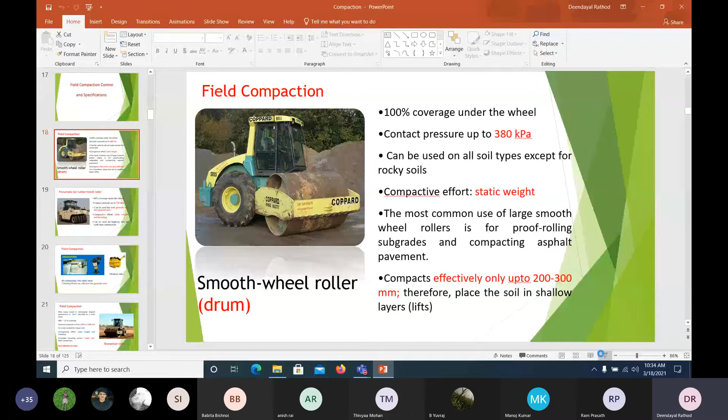So as I said, compaction generally, we need to find out the optimum moisture content from the laboratory test, and the maximum dry density. But how do we generally do this in the field?

We use this smooth wheel roller, heavy, which covers 100% of the area, and contact pressure can be up to 380. This particular compaction is effective only up to 20-30 centimeters.

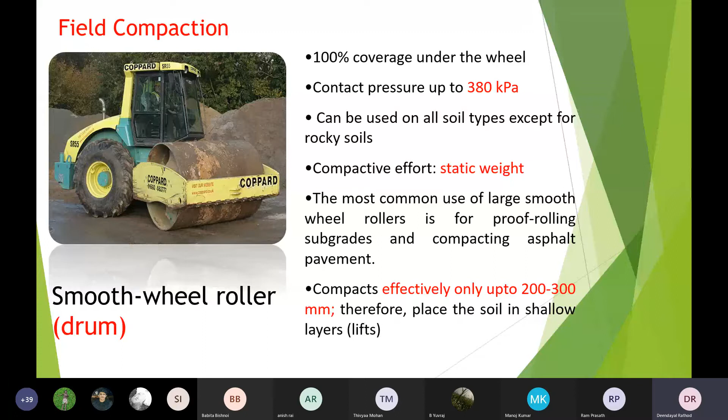You might have seen in villages where people lay down roads, we use this. And nowadays, not only static but dynamic compaction also exists - this roller may vibrate, the drum may also vibrate.

In foreign countries, you could see they use tires also - pneumatic rubber tires. Here 80% of the coverage area, but contact pressure would be high. By using this, both granular and fine grained soil can be compacted. Because of this, there would be some kneading action, so it can be used for highways, earthen dams, and so on.

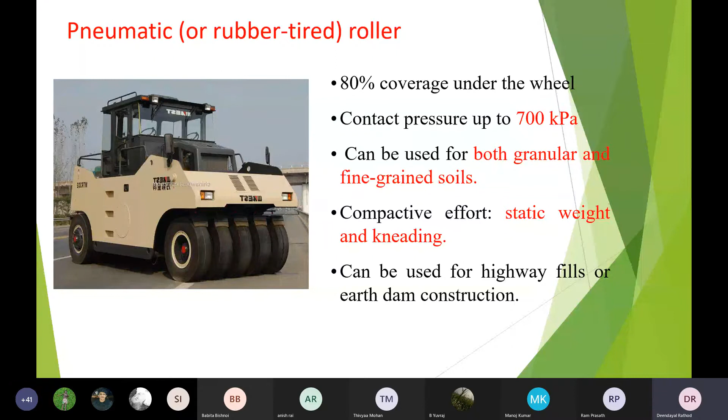There are some smaller size vibratory rollers also, whatever you are able to see in the figure. Wherever we cannot use a bigger size of roller, at inaccessible points where we cannot access, we can use these vibratory rollers by using plates for granular soil or cement, concrete, and so on.

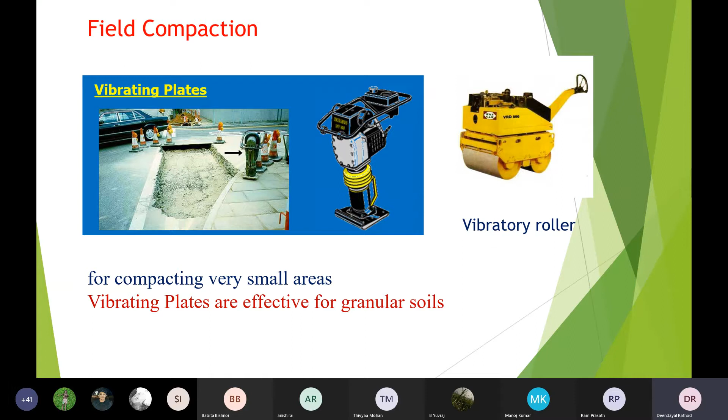This also can be used, and this is very important - this is like a rectangular shape, protrusion of feet attached to a steel drum, like our feet. Because of the kneading action, this particular roller would be used for clay soil, which is why it is called the sheepsfoot roller. Like a sheep foot, there would be some kneading action, because of that this type of roller will try to compact the clay type of soil.

It is not effective for sandy soil because we cannot use this kneading action there, it may not be required. But in the case of clay soil, this kind of kneading action can be used - very effective on clay soil, you must remember that. It is called the sheepsfoot roller.

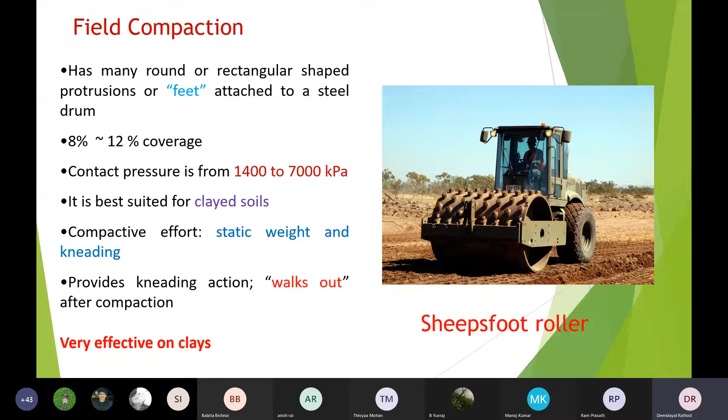And there are some rollers that provide deeper depth compaction - the impact roller, it will try to drop from some height, and we can give the impact load. It is effective up to 2 to 3 meter depth, like for example an airfield.

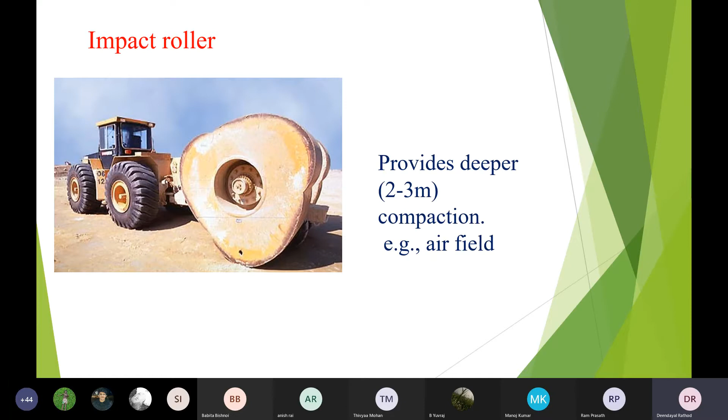Suppose I want to construct a platform or an airfield, where taking off and flights take place, a huge ground - there we will use this, because flights also land with impact load. The ground where flights take place or land should be very strong, should resist against the impact load also. So we use this kind of impact roller also.

And the tamping foot roller, this is one more type like a foot. It is best suited for fine grained soil like silt and clay soil. Static weight and kneading action would be there. Contact pressure would be very high, 1400 to 8,400 kPa, but coverage of area may be less, around 40%. The roller's coverage area would be 40%, but there would be kneading action, so we can use this kind of roller for clay type of soil.

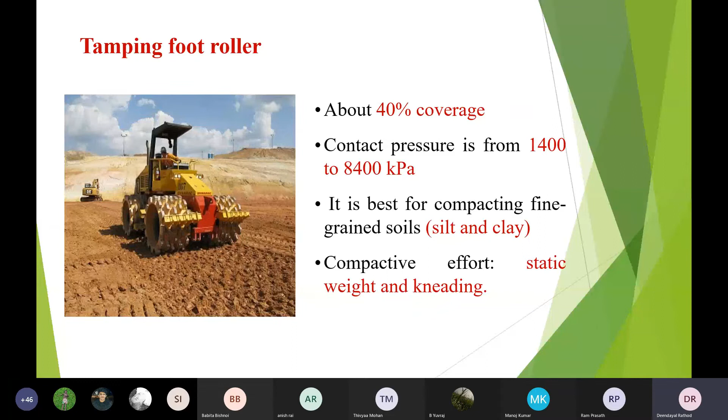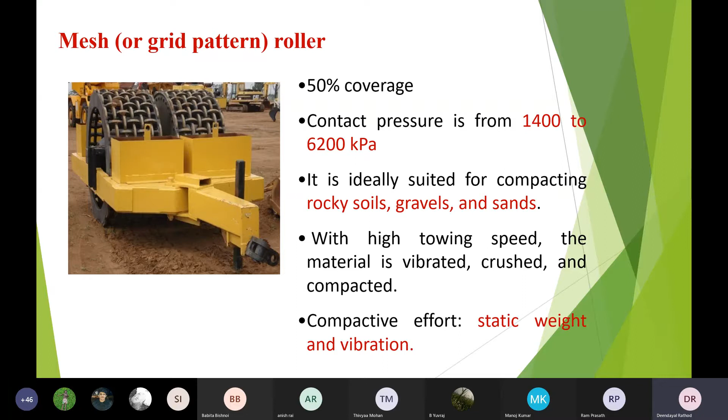Mesh or grid pattern roller has general 50% coverage, and it is ideally suited for rocky soil, gravelly soil, sandy soil, because rocks may break with this mesh. So this particular mesh kind of grid roller can be used for rocky soil - some soil will have soft rocks, so we can use this kind of roller also.

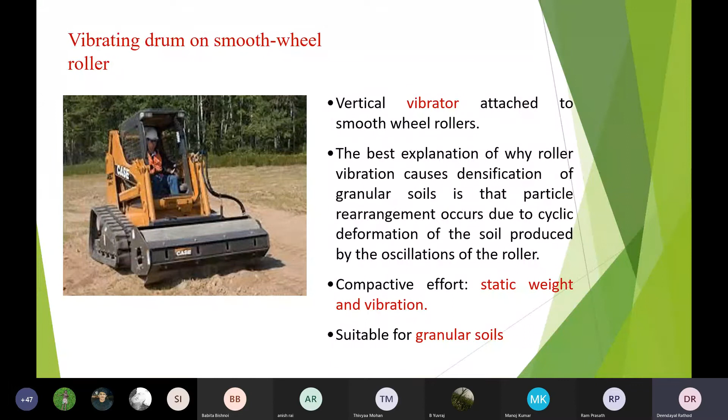And this is vibrating drum on smooth wheel roller. Wherever you cannot access, looking like a tanker, this kind of roller also can be used.

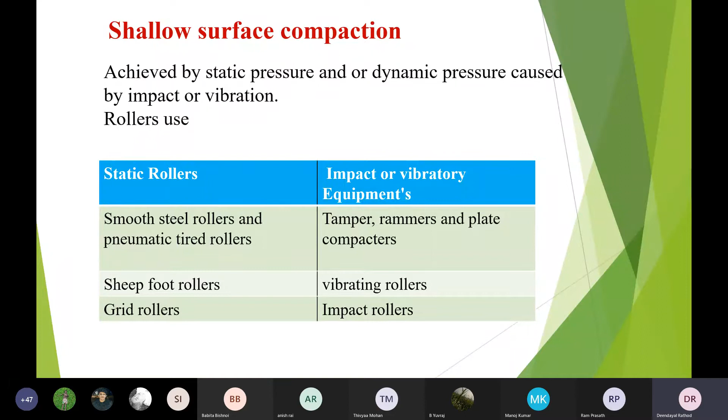Shallow surface compaction is generally achieved by static pressure and/or dynamic, impact, or vibration rollers. In the static rollers we have smooth steel rollers, pneumatic tires, sheep foot rollers, and grid rollers. In the impact and vibratory equipment we have tampers, rammers, vibrating rollers, impact rollers, and so on.

Now this is all about the static methods. For a lesser depth, we use this kind of rollers. Suppose I want to compact soil at a depth greater than a few meters, say 20, 30, or 40 meters or more, in that case we use dynamic compaction also.

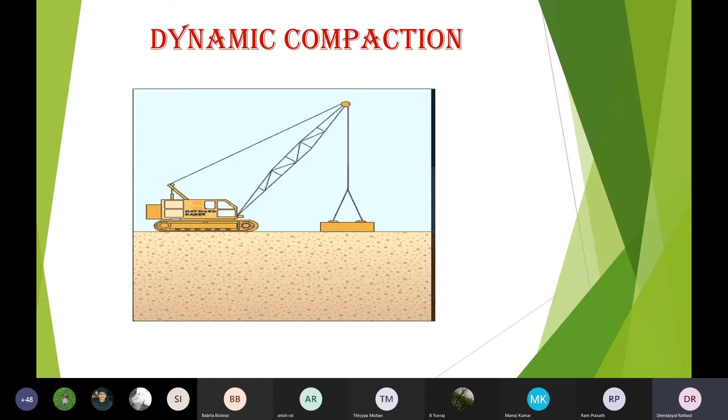For any bigger size of project, if the soil is loose, we use dynamic compaction. There are some companies doing this. Look at this picture: it is the compaction of unsaturated or highly permeable saturated granular material by heavy tamping.

The response of the tamping is very immediate. Weight ranges from 6 to 172 tons. Tons means 1000 kg, so 6000 kg to 172,000 kg weight would be dropped from a height of 10 to 40 meters, using cranes and so on.

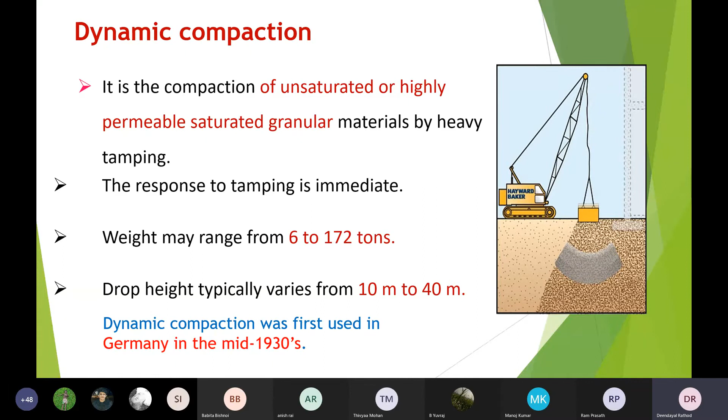This method was first used in the 1930s in Germany, and even now it is very common nowadays.

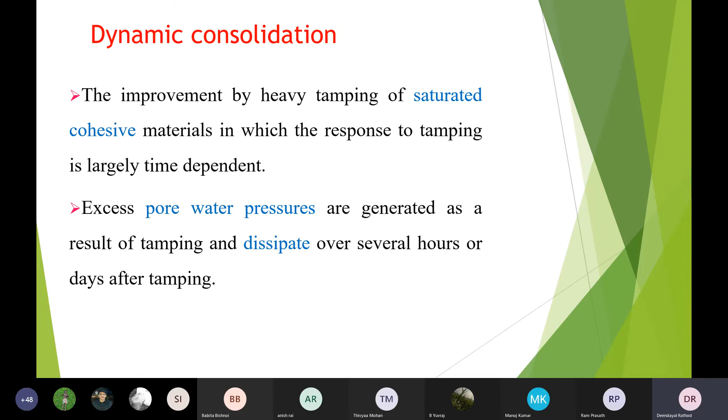The improvement by heavy tamping of saturated cohesive material, in which the response to tamping is largely time dependent: excess pore water pressure is generated, and dissipation of that may take place over several hours. This is because the soil holds some pore water pressure in the voids, and because of that it takes some time to dissipate.

You could see from here how heavy the weight is, and in addition a tire is also added, or some vehicle tire. This mass can be made of concrete, and there would be a hook to lift it, then it would be dropped from a height of 10 to 40 meters.

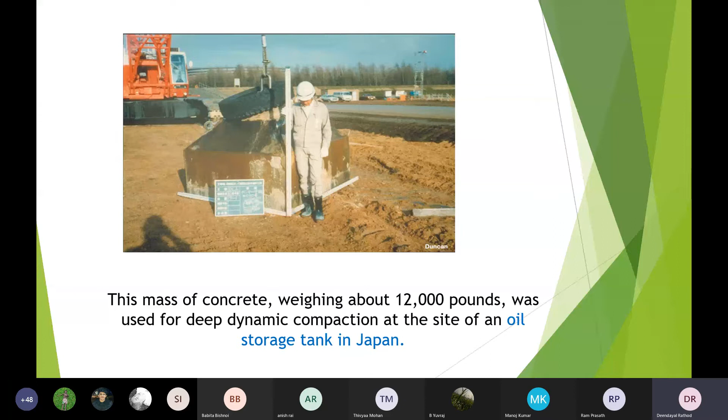Nowadays, even developed countries have bigger equipment for compaction. You could see the mass is lifted to a height of 50 feet, and then dropped. Look here when it hits the surface.

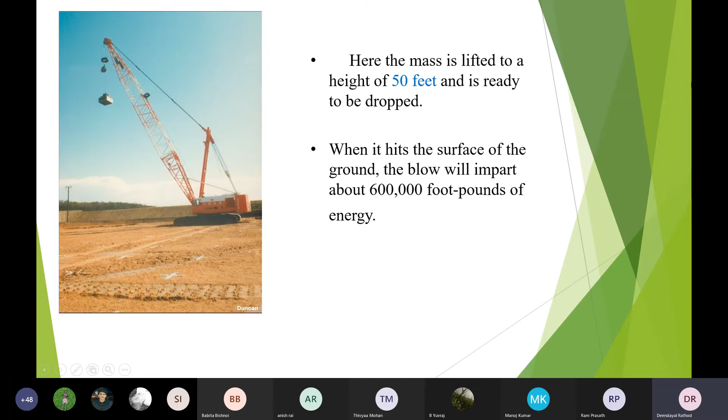I will show some more pictures. After dropping it, you could see some craters. Those dropping holes, whatever marking you could see, are called craters. I will show some more pictures.

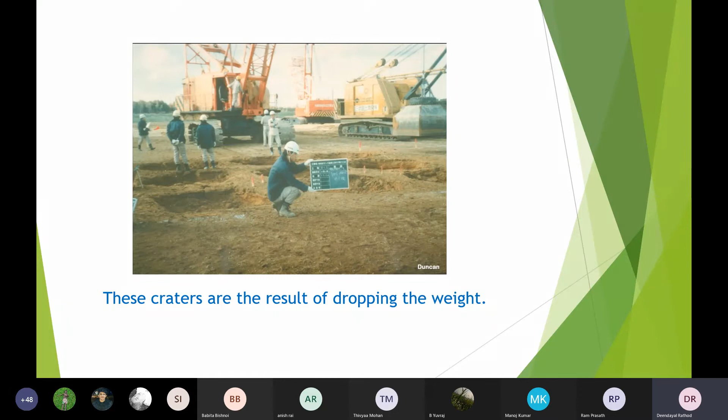This is what it looks like with dynamic compaction, and this is suitable for granular soils, landfill, and karst deposits. These are all called craters, created by the impact load.

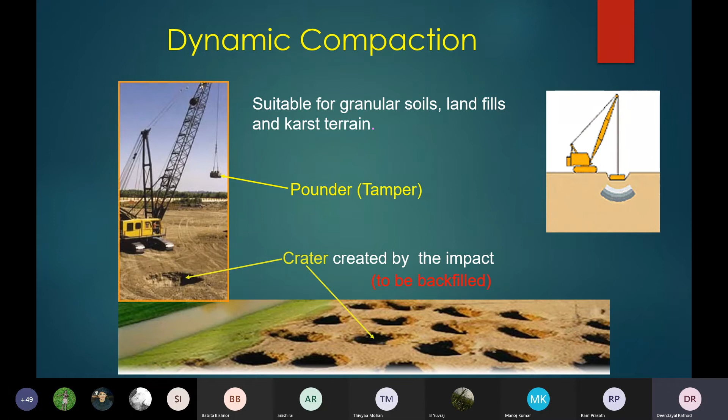To be backfilled, we again add soil or sand into the crater, and again we compact it. So this again shows the process.

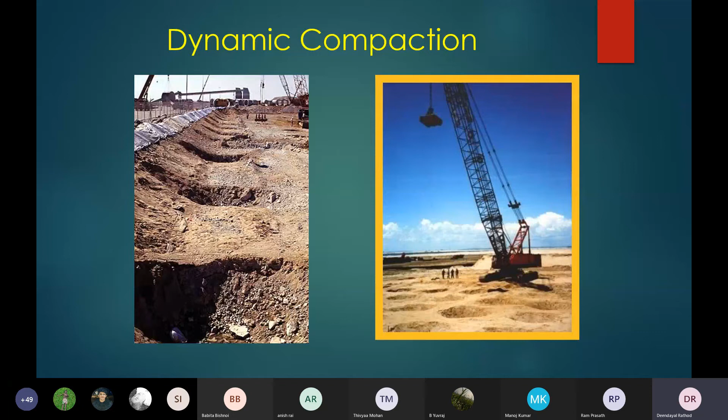This technique is used for very big projects. You might have seen some made-up soils in many projects. We have even created artificial islands like the palm tree in Dubai, and so many airports in Japan, Singapore, and other smaller countries. Because these countries are very small and don't have much land, they bring this made-up soil from somewhere, and the soil would be compacted.

They have done small islands, also artificial islands, where they have constructed their airports. Likewise there's a lot of use. We use many equipment for compaction.

Most soil types can be improved, including silt or some clay soils also can be improved, but compaction is mainly used for granular soil. Other methods like consolidation can also be used generally for expulsion of water, but for compaction we use granular soil only.

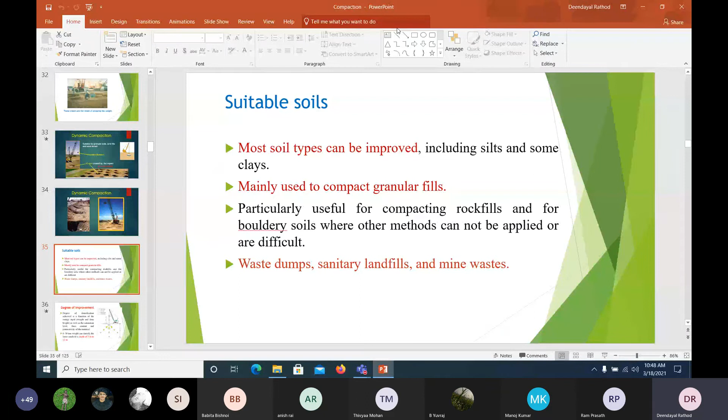It's particularly useful for compacting rockfills and boulder soil where other methods cannot be applied - waste dumps, sanitary landfills, mine waste. Nowadays we generate a lot of waste, so that waste can also be compacted. In the landfill we can use it, and after that waste we can convert it into fertilizer also. A lot of research is going on in this area.

We can find out the degree of improvement - they have some pattern while doing dynamic compaction. Look at these pictures, how beautiful it is - deep craters are formed by tamping.

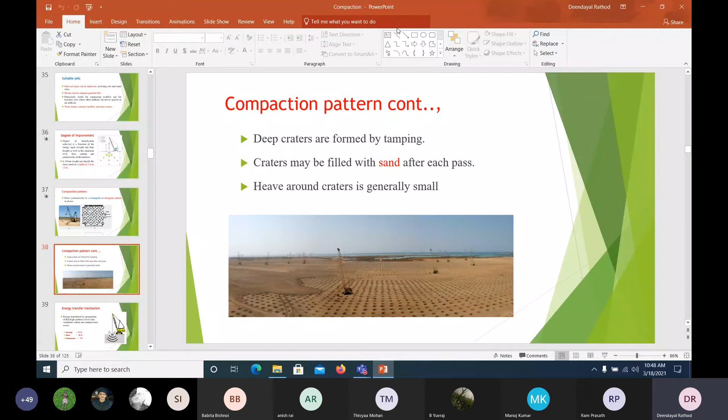Again it may be filled with sand. Some energy transformation also takes place - about 67% may be Rayleigh waves, then shear waves and compressive waves. Because of that also, compaction takes place.

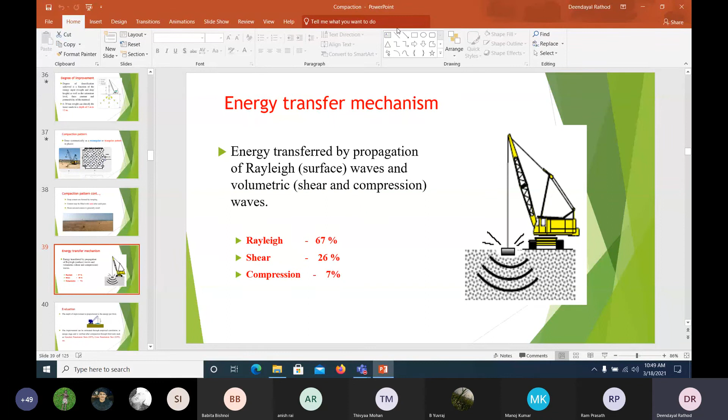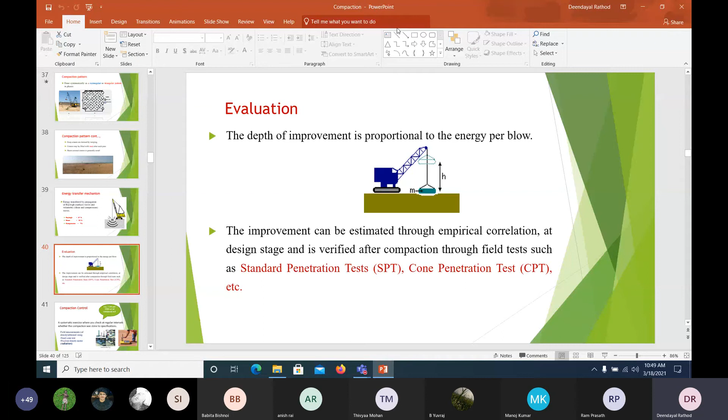We can evaluate it using SPT, CPT tests - there are some tests, that anyway we'll see. In geotechnical engineering too, you will see how we can control the compaction in the field also.

We have already seen this formula - how we can find out the relative compaction in the field and in the laboratory, multiplied by 100 will give the relative compaction. Generally, a typical required value would be 90 to 95, which we will get easily.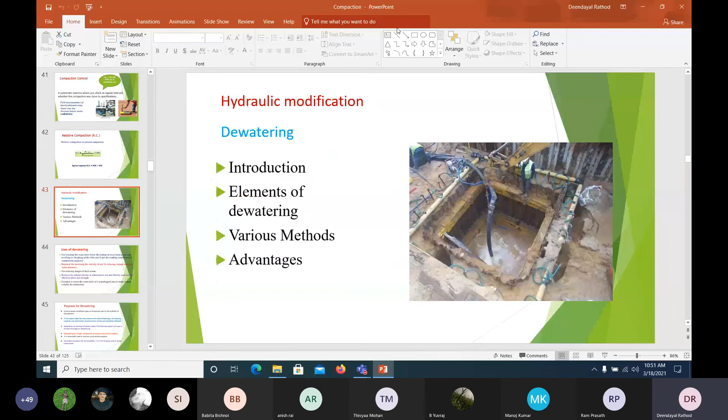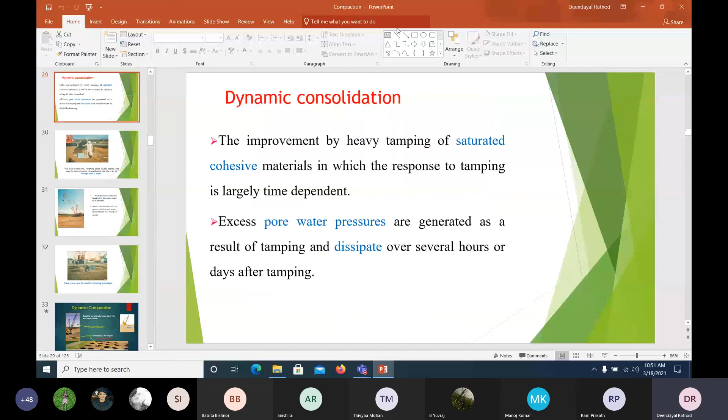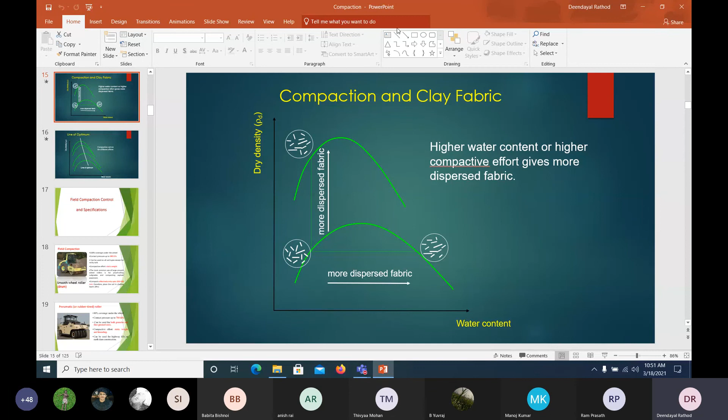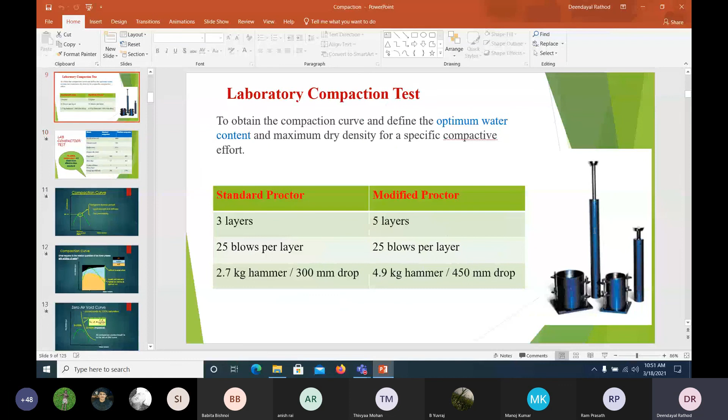So with that, I think we have completed compaction. We have seen how we can compact the soil in the field and in the laboratory, and how we can correlate them. We have also seen the line of optimum, because of compactive effort, modified compaction structures - the left side is flocculated, and when it becomes dense, the structure becomes dispersed. We also saw the two types of laboratory methods: standard Proctor and modified Proctor.